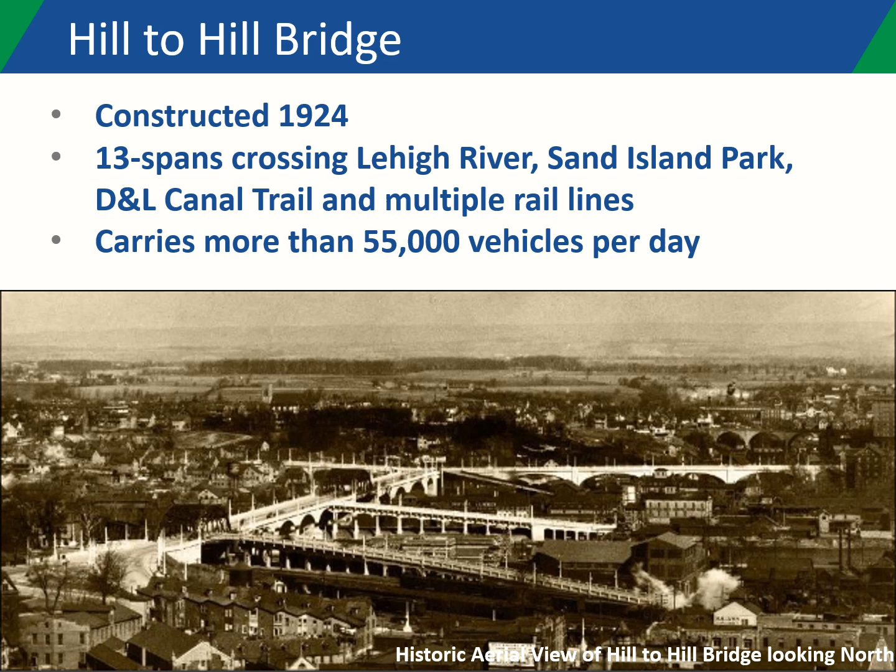Next, we will look at what goes into an alternatives analysis. The goals of the alternatives analysis for the Hill to Hill Bridge are to identify ways to address the deteriorating condition of the bridge, identify the resources which are present and surrounding the structure, look outside the bridge at issues such as traffic congestion, and collect input from stakeholders in the community.

There are 4 key phases of the alternatives analysis: 1. To define the study area. 2. To conduct data collection and analysis. 3. To identify the purpose and needs. And finally, 4. To develop alternatives and compare how well these alternatives meet the needs of the project.

The first step in the alternatives analysis is to define our problem area. We call this the project study area. Generally, this starts as the area that represents the combined footprint of all potential alternatives being considered.

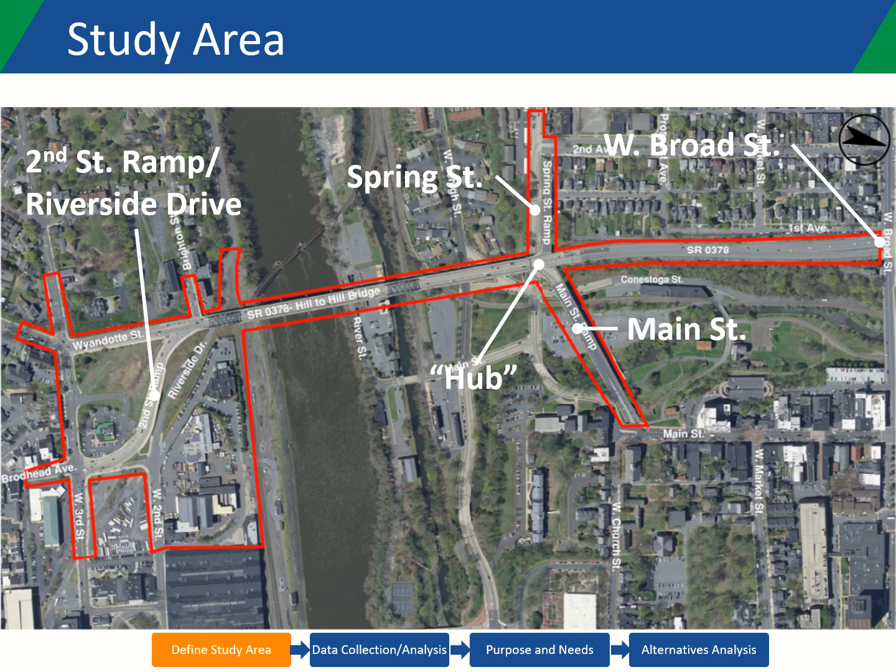For the Hill to Hill project, this area stretches out along SR 378 to include the West Broad Street overpass, the Main Street Ramp Bridge, the Spring Street Ramp Bridge, the hub, which is defined as where SR 378, Main Street, and Spring Street come together, the 2nd Street ramp and Riverside Drive, and the intersection of West 3rd Street and 378. The study area does not indicate the limits of disturbance, nor does it infer that all features within its boundaries will be worked on.

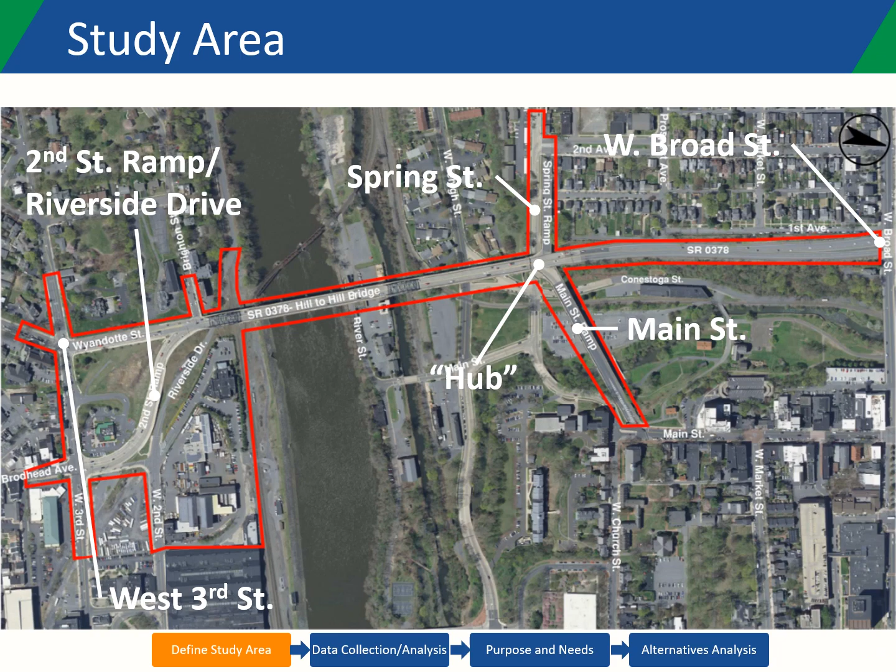With the study area defined, the project team can begin to initiate studies, conduct inspections, collect data, hear stakeholder input, and assess existing design criteria. This process has been ongoing for the Hill to Hill alternatives analysis.

Here are the highlights of the data collection and analyses which have been conducted so far. Supplemental inspection: a detailed field inspection of the existing Hill to Hill Bridge was conducted.

Recently, additional inspection efforts were completed for the Main Street and Spring Street ramps. These inspections help define the structural issues present and help develop structure-related needs for the project.

Stakeholder input: early input was received from several stakeholders and consulting parties from the surrounding community. This early engagement with project stakeholders is key to understanding the issues facing the community today and the potential impacts of construction.

Traffic and pedestrian studies. While this is the Hill-to-Hill Bridge project, there are significant traffic-related issues surrounding the structure. To understand these issues, traffic, pedestrian, and bicycle counts were conducted.

Average wait time, referred to as queue time, and travel time were evaluated. Turning movements were looked at, and levels of service, which help define how congested a roadway is in the existing condition, were identified. Why is all of this important?

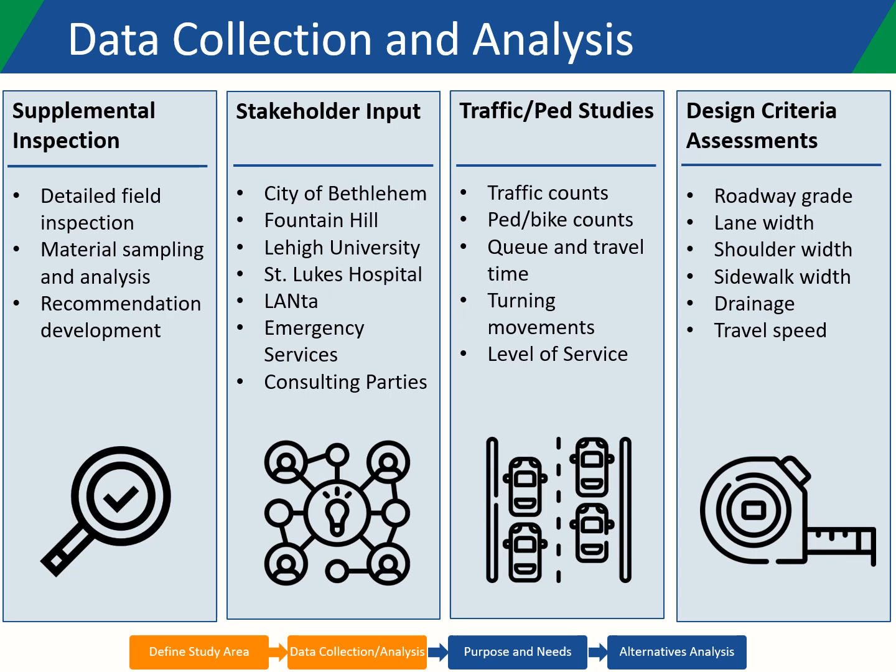For example, older structures tend to have been built with narrower widths. While the width may have been appropriate for vehicles that used these bridges decades ago, they may not meet current standards for lane widths.

As part of the data collection and analysis phase of the project, a list of site constraints is developed. Constraints may need to be avoided or the impact to them minimized.

For example, there are numerous utilities present which use the existing Hill-to-Hill bridge structure to cross the Lehigh River, pass under the approaches to the bridge, or are located within the study limits. These utility lines and the potential effects related to construction must be carefully considered as alternatives are assessed.

While temporarily shutting down an electric line to facilitate construction is possible in some circumstances, it comes at a cost to the project schedule and impacts the utility company and their customers.

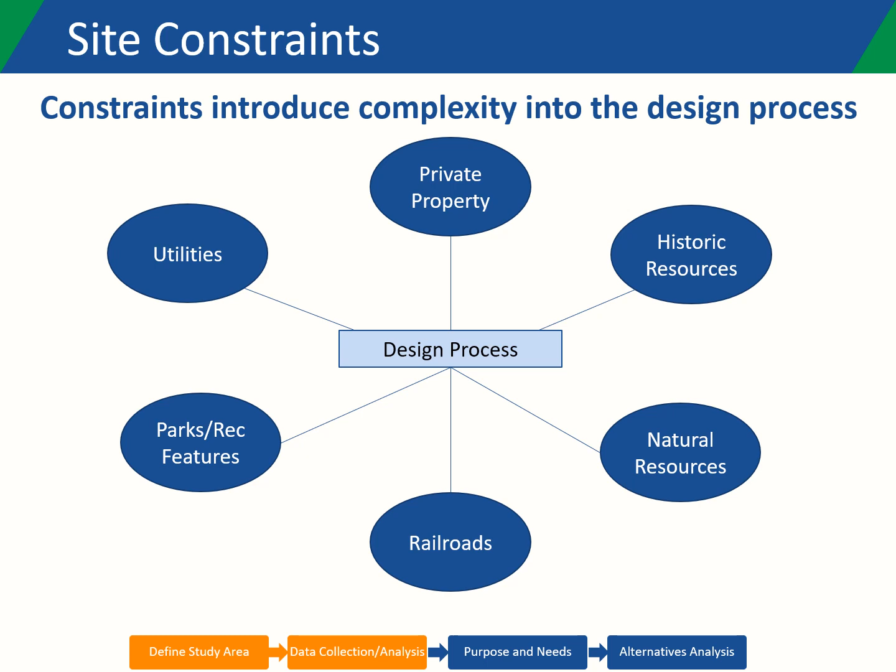Other examples of constraints include natural resources, railroads, public parks, and recreational features and private property. The following slides walk through some of the site constraints which exist for the Hill-to-Hill Bridge project.

using conduits located underneath of the existing sidewalks. These include fiber optic, cable, and telephone lines.

The design team will coordinate with these utilities to determine if temporary interruptions are acceptable, and if not, how the lines can be preserved and temporarily supported throughout construction.

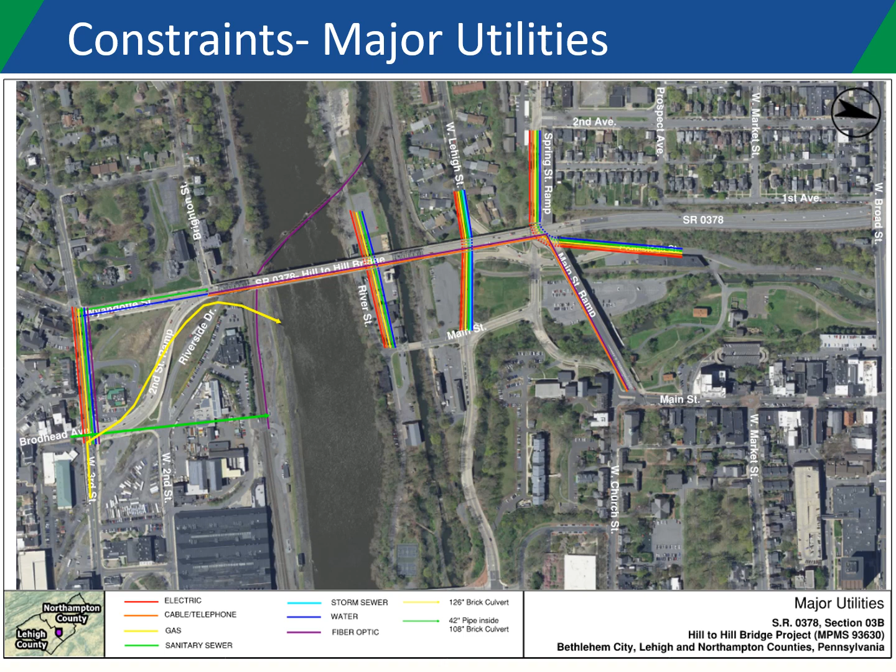Permanent relocation of utility lines may also be assessed. However, given the need to cross the Lehigh River, this is unlikely.

There are 4 primary Norfolk Southern rail lines throughout the project study area, which run underneath of the existing Hill-to-Hill Bridge on the north and south sides of the Lehigh River.

There are minimum horizontal and vertical clearances for these lines, which must be considered for alterations to the existing structure and for any new structure which may cross over the line.

These represent vertical constraints on the project and result in direct impacts to how alternatives tie back into the approach roadway on either side of the structure.

Having to provide additional vertical clearance for a new structure, for example, could result in significant work to tie the new structure back down into the existing approach roadways.

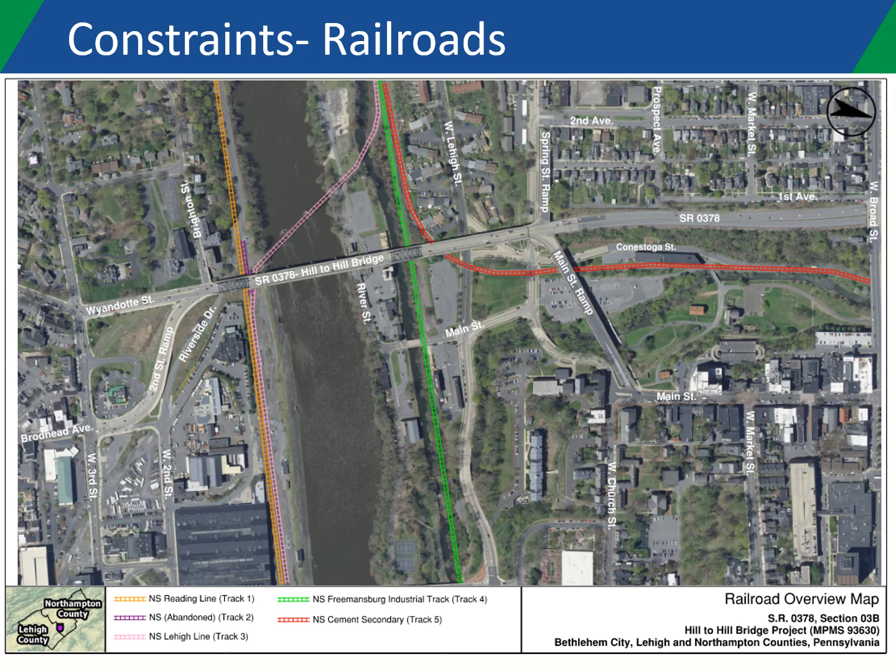Another consideration is the presence of trails within the project study area. Enhancing bicycle connectivity is a regional and national goal that the Hill-to-Hill Bridge project must consider.

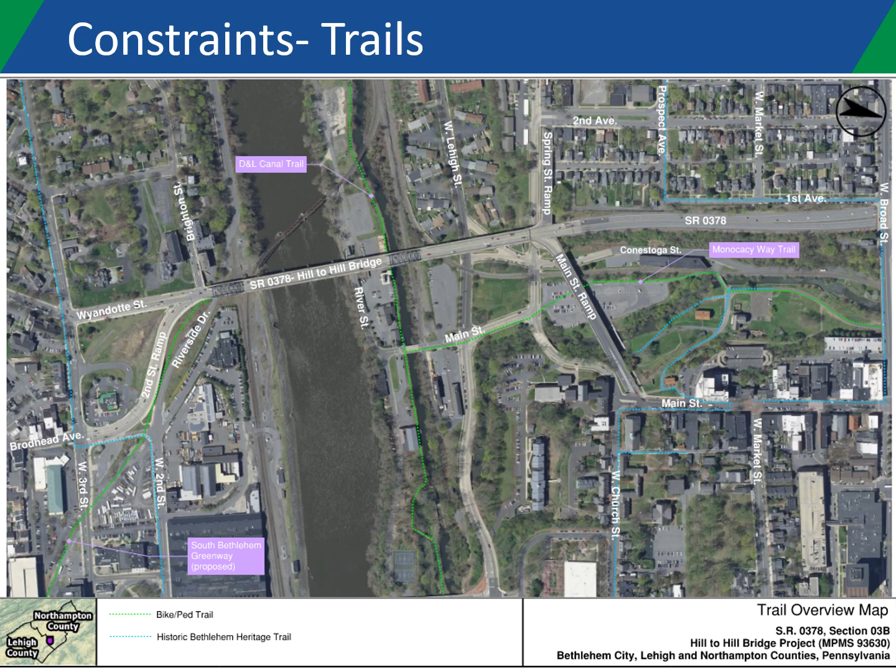Recreational features such as the D&L Canal Trail and the planned South Bethlehem Greenway are located near the project, and improving connectivity for bicyclists and pedestrians was brought up early on by project stakeholders as an important local consideration.

There are also a number of environmental constraints present within the project study area, including historic resources shown in yellow, recreational resources shown in green, and special protected recreational lands shown in purple. Additionally, there's a levee system along the south bank of the Lehigh River.

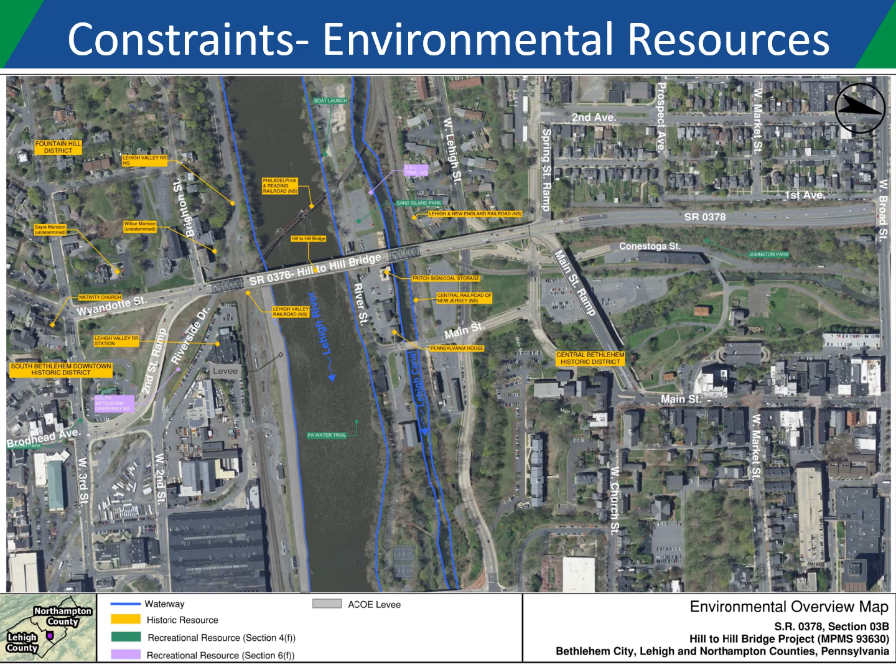Generally, the governing laws and regulations which protect these resources require that transportation agencies look to avoid impact, if possible, to these resources. If impacts are unavoidable, they must be minimized and mitigated. A key component of the alternatives analysis is evaluating each alternative's impact to these resources and determining if the purpose and need of the project could be accomplished through an alternative which avoids or lessens impacts.

As touched on in the previous slide, adverse effects to historic and archaeological resources must be avoided if possible. If adverse effects are unavoidable, agencies are required to minimize their impact to the extent possible and develop mitigation measures to offset these impacts.

As part of this project's initial studies, research was conducted into the surrounding historic resources to determine which are eligible for inclusion on the National Register of Historic Places. Present within the study limits are individual resources such as the Nativity Church and Lehigh Canal, and historic districts such as the Central Bethlehem and South Bethlehem Downtown Historic Districts, which are comprised of dozens of contributing resources.

While many of these resources intersect the project area and the study limits, the two resources which are most likely to be impacted by several of the alternatives being studied are the Hill-to-Hill Bridge itself and the Fritch Fuel property. These are detailed further on the next slide.

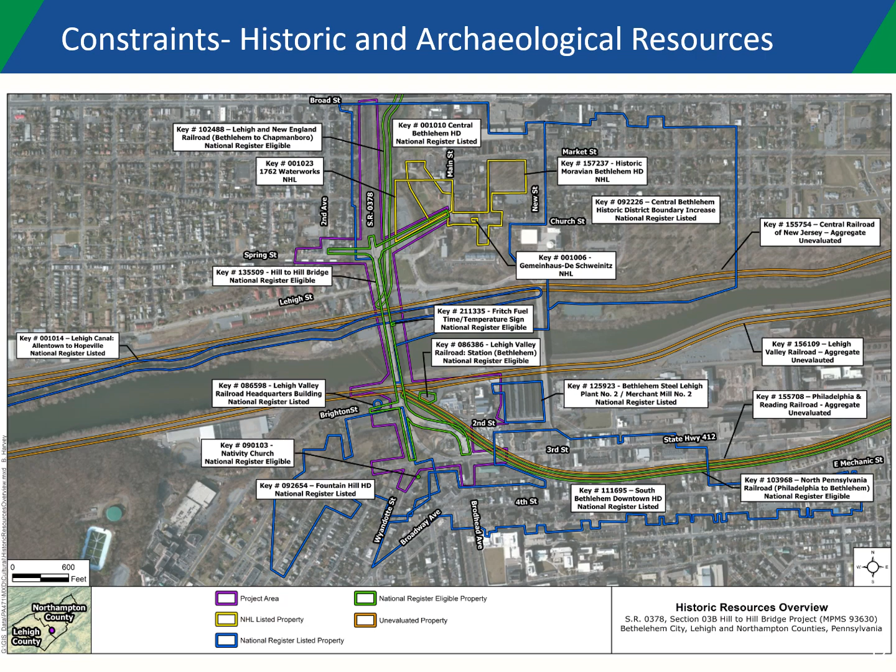During the early studies for this project, the Hill-to-Hill Bridge was evaluated to determine its eligibility for inclusion on the National Register of Historic Places. It was found eligible, with its character-defining features being the closed spandrel arches, decorative concrete elements, and the Hudson truss spans. Alterations to these components of the bridge may result in an impact to its historic designation.

In addition to its eligibility as an individual resource, the Hill-to-Hill Bridge is a contributing resource to the Central Bethlehem and Fountain Hill historic districts.

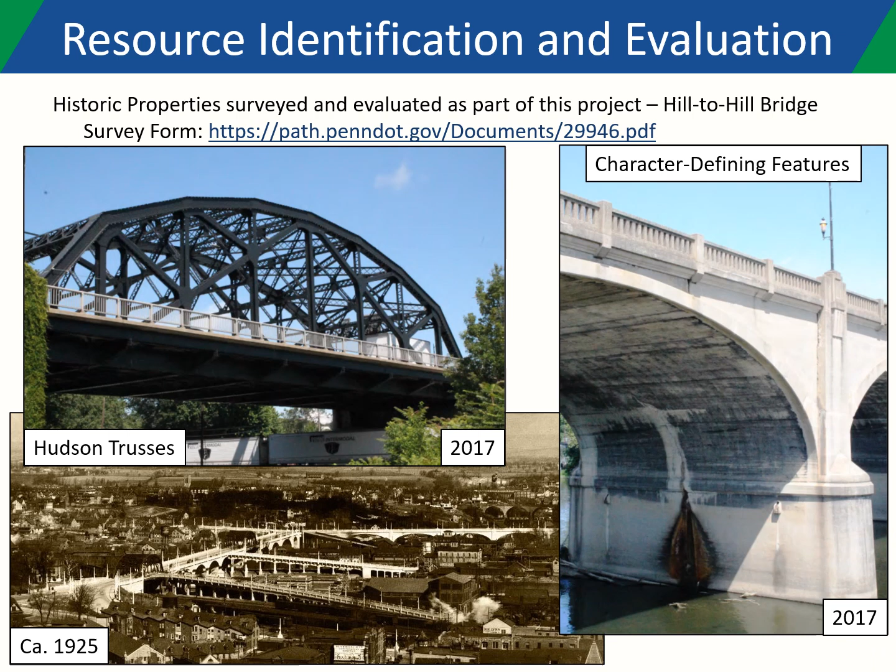The early studies also determined that the Fritch Fuel Company time and temperature sign is eligible for the National Register of Historic Places. The coal bins on which the sign sits today had already been determined to be contributing resources to the Central Bethlehem Historic District in 1986.

Additional information on historic resources for the project can be found at path.penndot.gov.

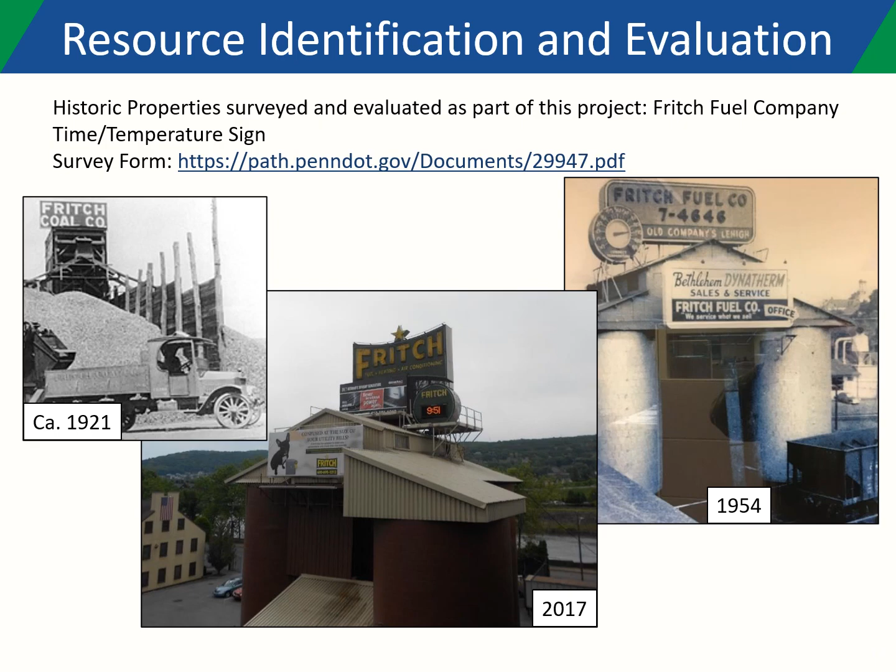Next, we will talk about purpose and need, its role in transportation projects, and its importance when assessing alternatives.

The purpose and need statement is the foundation on which transportation projects are built. The purpose is an overarching statement of what the project is intended to accomplish, while the needs are specific problems or deficiencies that the project seeks to address. Together, these form the purpose and need statement.

It's important to note that the purpose and need statement does not dictate an outcome or identify a solution. It's a problem statement that is used as the bar to measure all alternatives by.

The data collection, analysis, stakeholder input, and preliminary studies which have been conducted up until this point help define the project's purpose and needs. The purpose and needs statement is developed in close coordination with the Federal Highway Administration, which, due to the anticipated use of federal funds for construction, are the lead federal agency for this project. Alternatives which cannot meet the purpose and needs are dismissed from further consideration.

For the Hill-to-Hill Bridge, the purpose of the project is to provide a long-term safe and efficient crossing which facilitates vehicular, rail, bicycle, and pedestrian flow, while also accommodating the current and future growth of the city and generally maintaining or improving upon network congestion levels compared to future no-build conditions.

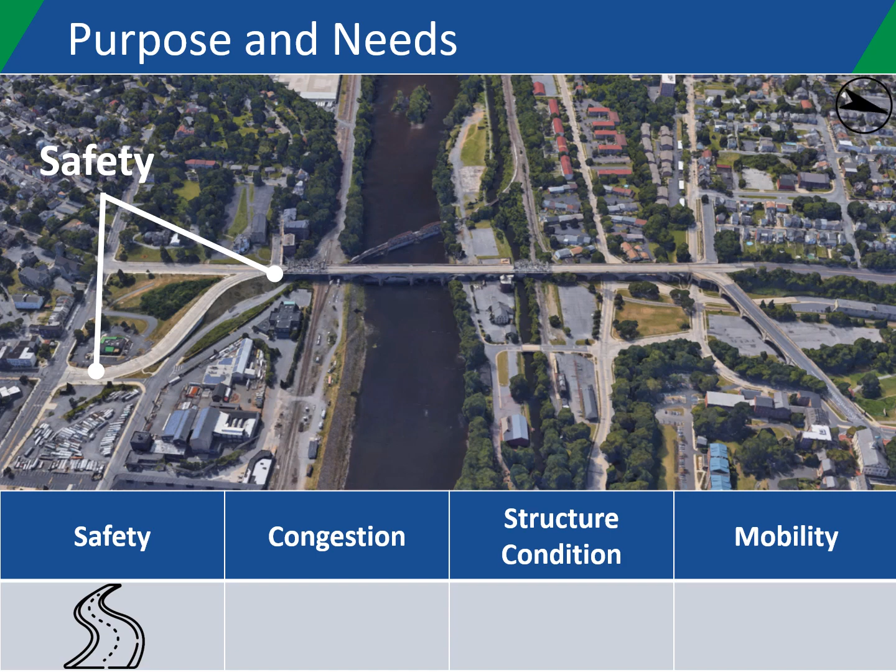Based on the types of crashes observed, a primary factor is likely the lack of sufficient stacking length for vehicles. Additionally, there is insufficient turning radius on the south end of the bridge for southbound vehicles turning right onto Brighton Street and for vehicles turning onto the northbound lanes across the bridge from the 2nd Street ramp.

Congestion. The Hill-to-Hill Bridge serves as a vital link for the city and is a regional transportation route. Based on initial studies conducted, over 55,000 vehicles per day on average use the bridge, with 6% of those being trucks. During the AM and PM peak hours for travel, significant congestion is regularly observed. Based on traffic studies conducted for the project, which simulate what traffic will be like in the years to come, congestion is not forecasted to improve.

The major causes of congestion identified in the project limits occur on the south side of the Lehigh River and include the following: lack of capacity for southbound traffic traveling on 378 at 3rd Street, lack of queue storage for northbound traffic on 378 at the 2nd Street ramp, and lack of capacity for southbound left turns from 378 to the 2nd Street ramp and northbound right turns from the 2nd Street ramp to 378.

The ability of each alternative to improve the existing congested conditions is assessed as part of the alternatives analysis.

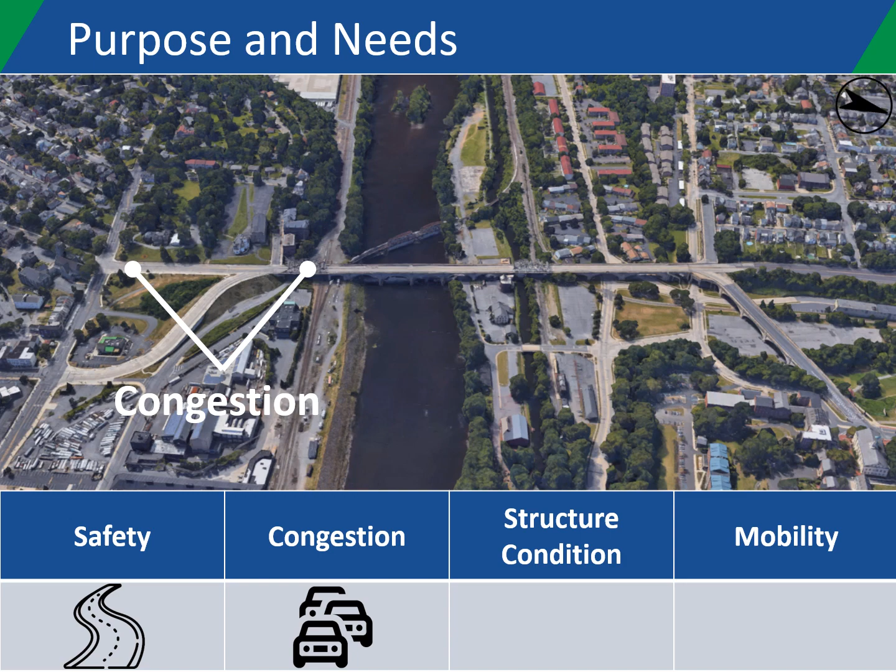Structure condition. Several elements of the existing Hill-to-Hill Bridge, whether by original design or through wear and tear over the years, warrant action to ensure that the structure does not deteriorate any further. Based on recent inspections, the main repairs required to extend the life of the bridge include improving the drainage system, repairing deteriorated concrete throughout the bridge, and repairing the steel trusses.

The ability of each of the alternatives to address these observed deficiencies is assessed as part of the alternatives analysis.

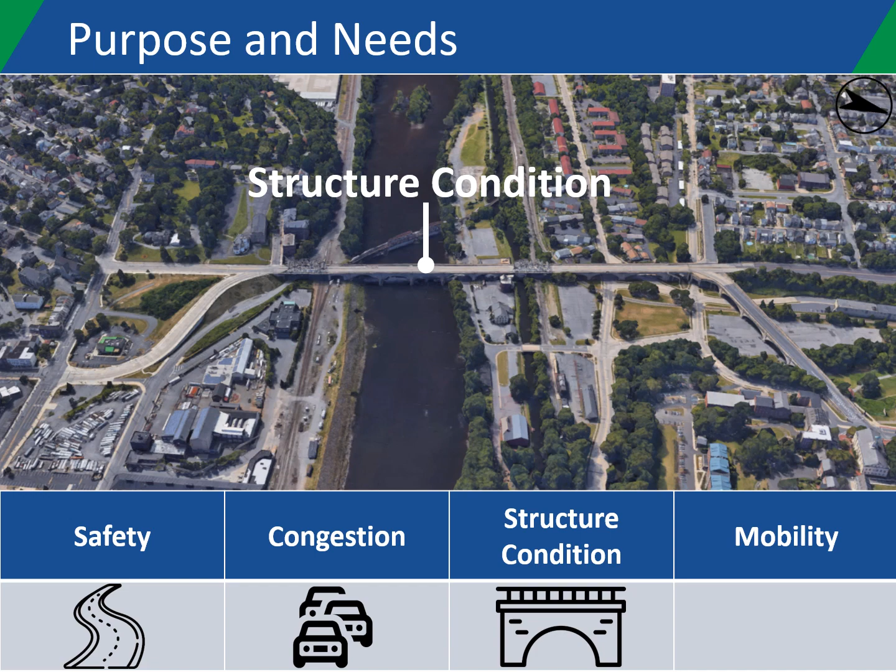Mobility and modal interrelationships. SR 378 connects the north and south sides of the city of Bethlehem, providing a critical link for residents, businesses, and services. Not only does it serve as an important role in connecting the north and south sides of Bethlehem, it also is critically important for many festivals and activities which take place throughout the year, including Music Fest.

Initial studies have indicated that nearly 300 to 350 pedestrians and 60 to 100 bicyclists use the bridge each day. During events such as Music Fest, up to 150 to 250 pedestrians use the bridge per hour. Trails, both existing and planned, also are anticipated to result in increased usage of the bridge by pedestrians and bicyclists.

Additionally, the bridge serves as a connection for public transit. However, based on initial coordination with LANTA, buses currently do not route over the bridge due to unreliable travel times. Maintaining and improving upon these important interconnections with a variety of modes of transportation is a core need for this project.

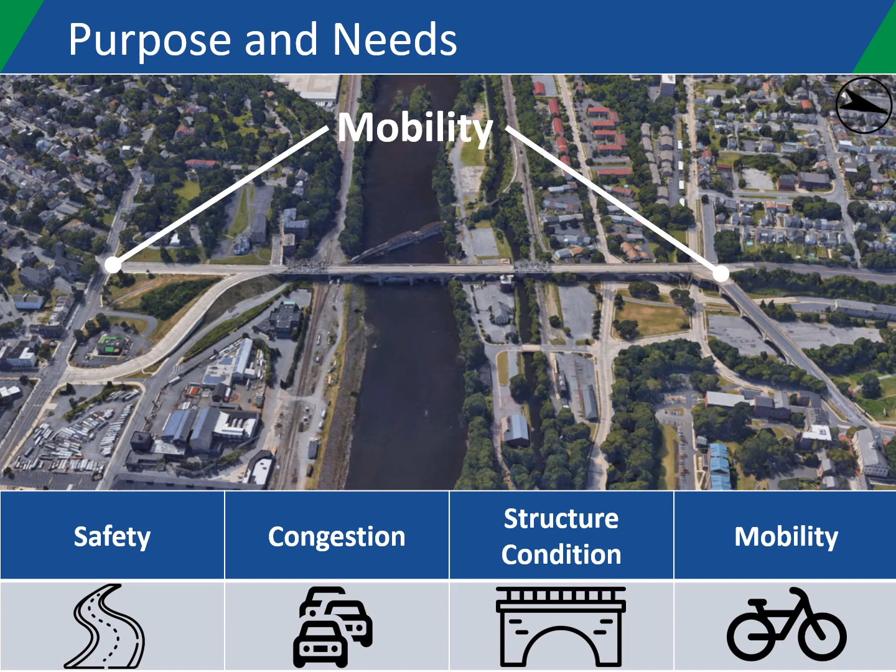In addition to the project needs, project goals can be developed. Goals are defined as secondary objectives and, unlike project needs, cannot be used to dismiss alternatives. These are the nice-to-haves, which may come from stakeholder coordination or local requests.

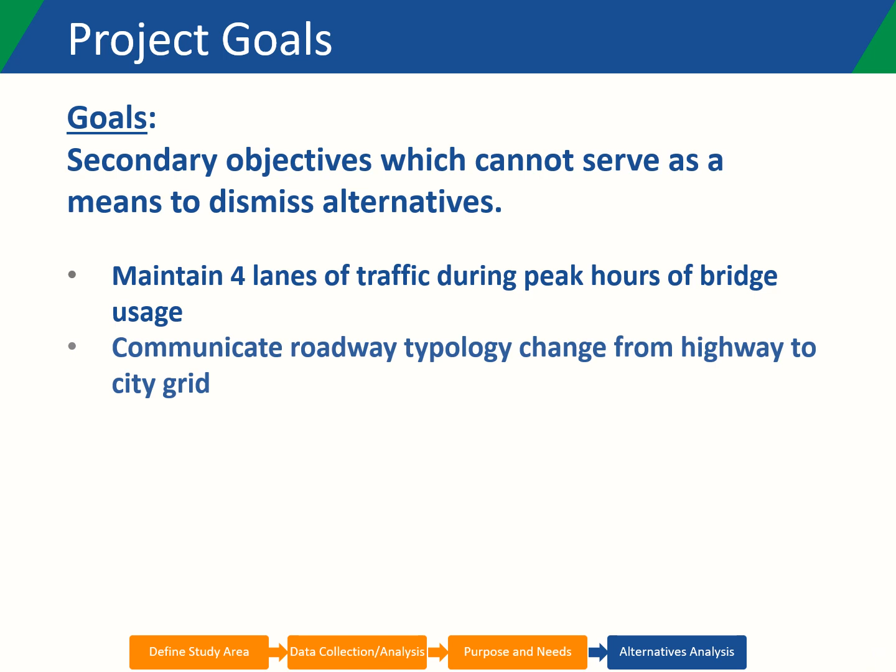For the Hill-to-Hill Bridge project, 6 main goals were developed and include the following: maintain 4 lanes of traffic during peak hours of bridge usage, communicate roadway typology change from highway to city grid, minimize impacts to cultural resources, improve 2nd Street connection, preserve Main Street ramp bridge, and design not to preclude future improvement, for example, plans by the city, railroad, trails, PennDOT, etc.

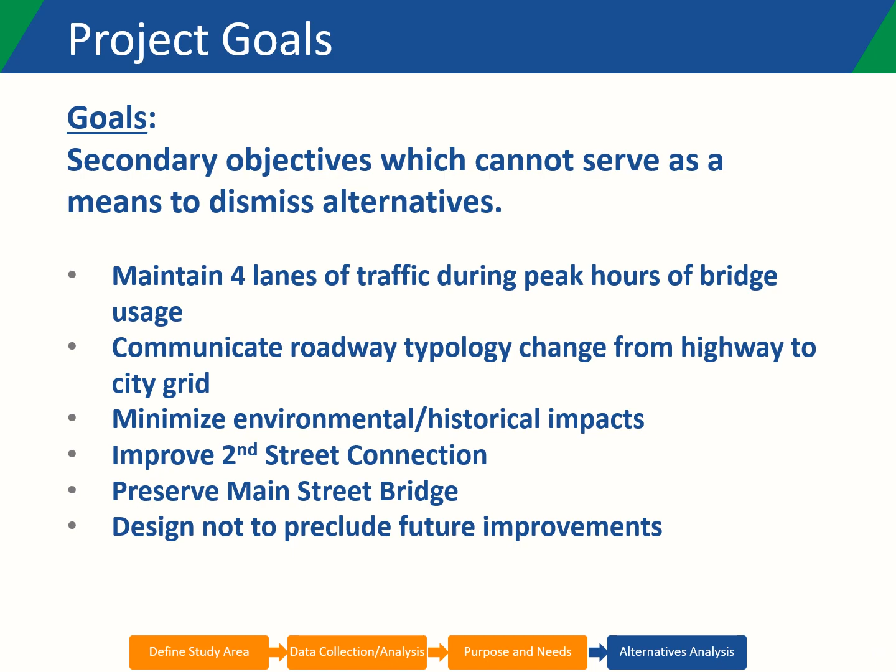As you will see in our discussion today, a key challenge for the alternatives is completing the work while limiting impact to the surrounding transportation network. With SR 378's high traffic volume and a lack of suitable crossings which could handle this number of vehicles, maintaining access across the bridge for traffic during construction is a key issue.

For example, Alternative 2 included the full rehabilitation of the existing structure, including the removal and replacement of fill material which resides underneath of the pavement and on top of the existing concrete arches. To accomplish this type of work, a significant amount of time and access is needed, resulting in long duration shutdowns of the Hill-to-Hill Bridge. Even with this structure work, this alternative would still not address the safety and congestion needs.

For these reasons, this alternative was dismissed from detailed analysis. Alternative 3A was dismissed as it would include the removal of the southern truss from the existing bridge, resulting in an impact to the bridge's historic character, and because of another alternative developed, 3B, which accomplishes a similar level of benefit with a lesser impact by preserving the trusses.

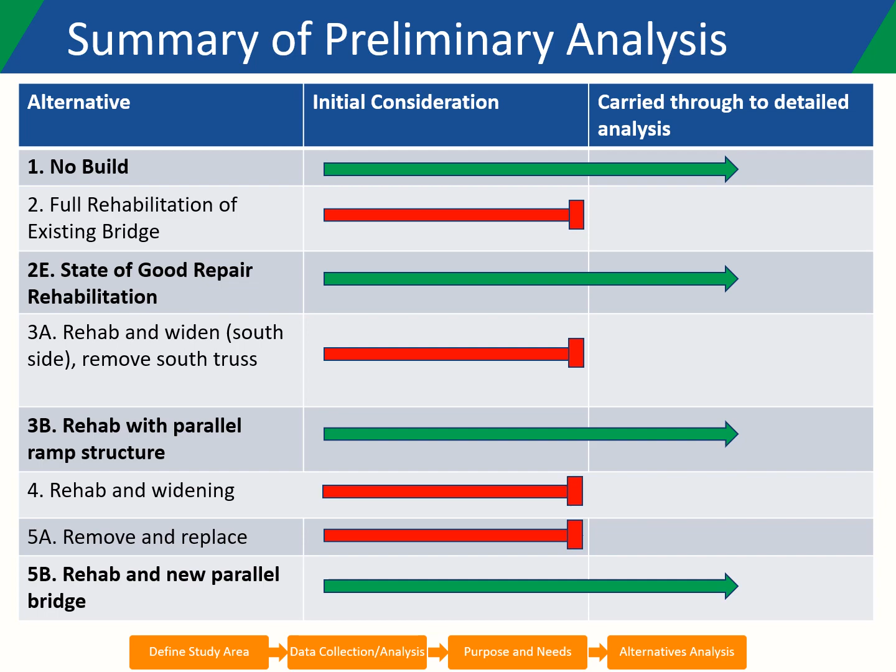For each of the alternatives which progress to detailed analysis, we will walk through their scope of work and describe how each meets or does not meet the project needs.

A green check mark above the need symbol indicates that the base need has been met. Alternatives which fully meet the needs receive a green check and the full symbol, while alternatives that make improvements and therefore meet the minimum base need use a partial symbol.

The first alternative, the no-build alternative, typically receives the most questions during public and stakeholder engagement as people wonder why this do-nothing alternative is even being considered. This alternative includes no physical work on the structure or approaches, and serves as a baseline by which other alternatives can be assessed.

For example, the design team may investigate how traffic patterns are anticipated to evolve in the future if conditions remain as they are today. This is a helpful tool in understanding how much each alternative is anticipated to improve on the existing conditions of today, as well as the conditions 10 to 20 years from now.

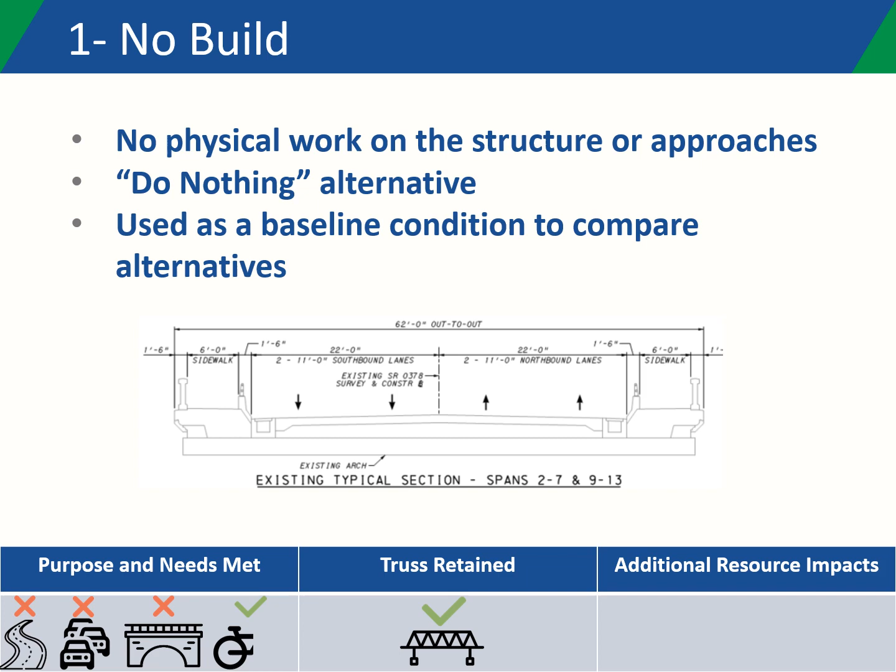There are no additional resource impacts for the no-build alternative. However, by doing nothing to address the condition of the existing bridge, it will continue to degrade. Components which are significant to its designation as a historic resource will also degrade and may eventually result in effect to its historic status.

Alternative 2E represents the state of good repair level rehabilitation of the existing structure. The goal of this alternative is to extend the structure's service life. This alternative maintains the existing structure and its geometry and includes preventative level repairs, improvements to drainage, roadway surface repair, sidewalk and pedestrian railing repair, and improvements to lighting.

So how does this alternative meet the needs of the project? For the safety need, Alternative 2E does not provide the minimum required lane widths due to there being no widening. However, this alternative does not address the insufficient stacking length or limited turning radius at the south end of the bridge. Therefore, Alternative 2E does not meet the safety need and receives a red X above the safety need symbol.

For the congestion need, Alternative 2E does not address the queuing problem for left turns onto the 2nd Street ramp. Therefore, this alternative does not meet the congestion need.

For the structure need, this alternative addresses the basic deteriorated features observed as part of the detailed inspection. It would include repairs to the existing trusses and structural repairs at localized areas which are easily accessible. The existing roadway would receive spot repairs and a concrete overlay. While these surface level repairs are sufficient to achieve the core structure need, they do not address the underlying issues which cause deterioration of the bridge deck.

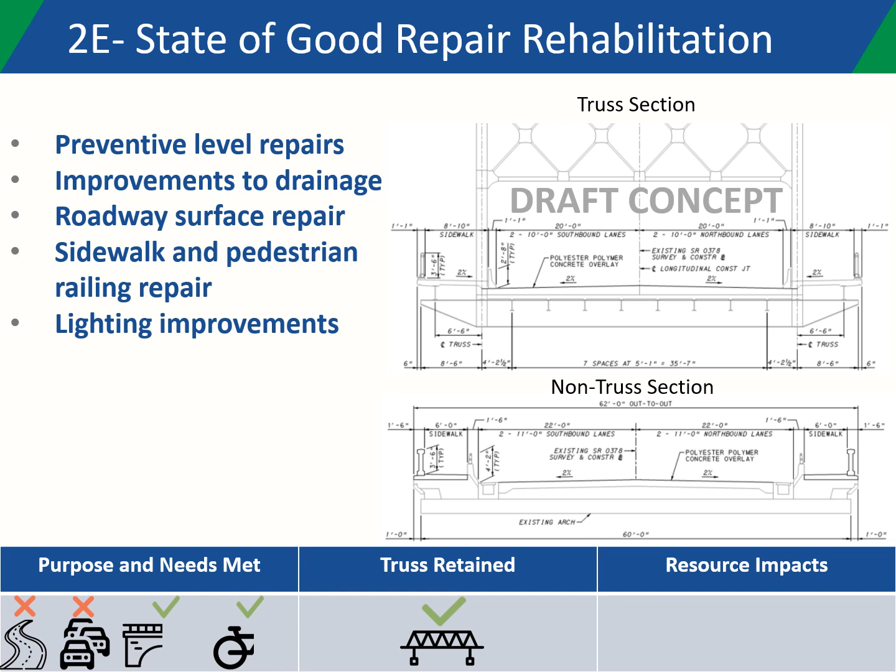Given the limited scope of work on the existing bridge, the north and south trusses would be maintained, and there are no additional anticipated resource impacts.

As was seen with Alternative 2E, the safety and congestion needs were not met since additional width on the bridge is needed at the 2nd Street intersection to reduce congestion.

Alternative 3B iterates on 2E by including the same level of rehabilitation scope while adding a new parallel structure on the south end of the existing bridge to provide additional width. This results in a balanced approach between accomplishing the needs of the project and minimizing the impact of the surrounding constraints, properties, and resources. The new eastern structure would be constructed to support 2 northbound travel lanes and a sidewalk. The new structure would taper back and tie into the existing structure just before the northern truss, allowing both the southern and northern trusses to be maintained under this alternative.

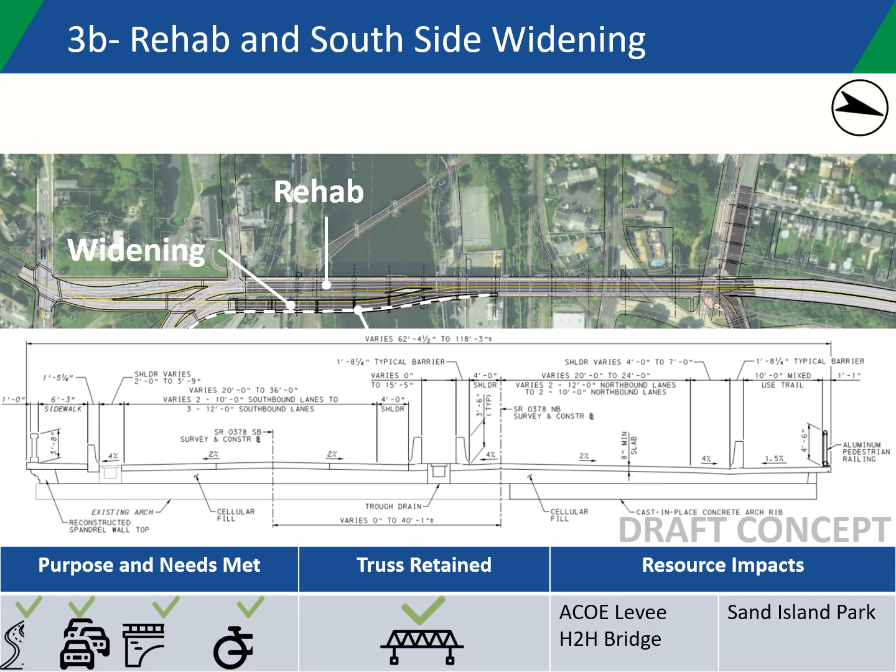Looking at the needs of the project, we first review the safety need. Similar to Alternative 2E, Alternative 3B maintains the minimum required lane widths across the existing structure and adds additional shoulder width on the southern end to address the existing substandard width. The turning radii from the 2nd Street ramp to the northbound travel lane on the bridge is improved by the parallel structure on the southern end. However, the movement from the southbound travel lane to Brighton Street is not improved, and the northern portion of the bridge maintains its existing section. This alternative addresses the insufficient stacking length and improves the 2nd Street ramp turning radii at the south end of the bridge. Therefore, it meets the minimum basic safety need.

Regarding the congestion need, this alternative improves upon 2E by adding an additional left turn movement onto the 2nd Street ramp. A right turn lane to westbound 3rd Street is also added under this alternative. Based on our preliminary traffic analyses, these are the most impactful ways to address the congestion need, and so this alternative meets the congestion need.

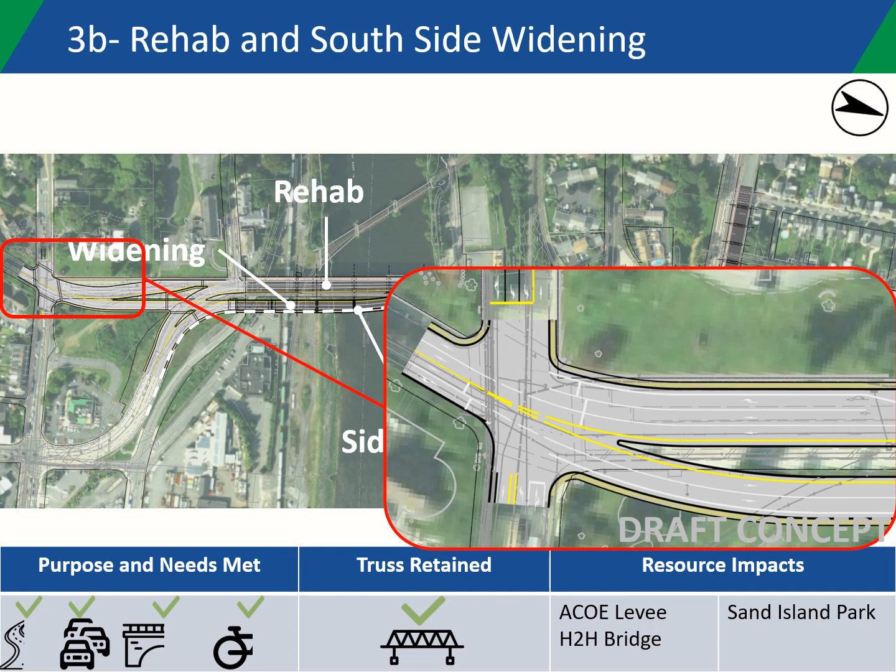Alternative 3B retains the same rehabilitation scope as 2E, which improves the structure condition. Therefore, it too meets the minimum basic structural need.

Regarding the mobility need, Alternative 3B provides a 6-foot sidewalk along the new parallel ramp structure, which can be used by pedestrians and bicyclists who choose to walk their bikes across the bridge. While this is an improvement to access compared to 2E, it does not carry a mixed-use trail across the bridge. This alternative, therefore, meets the minimum basic mobility need.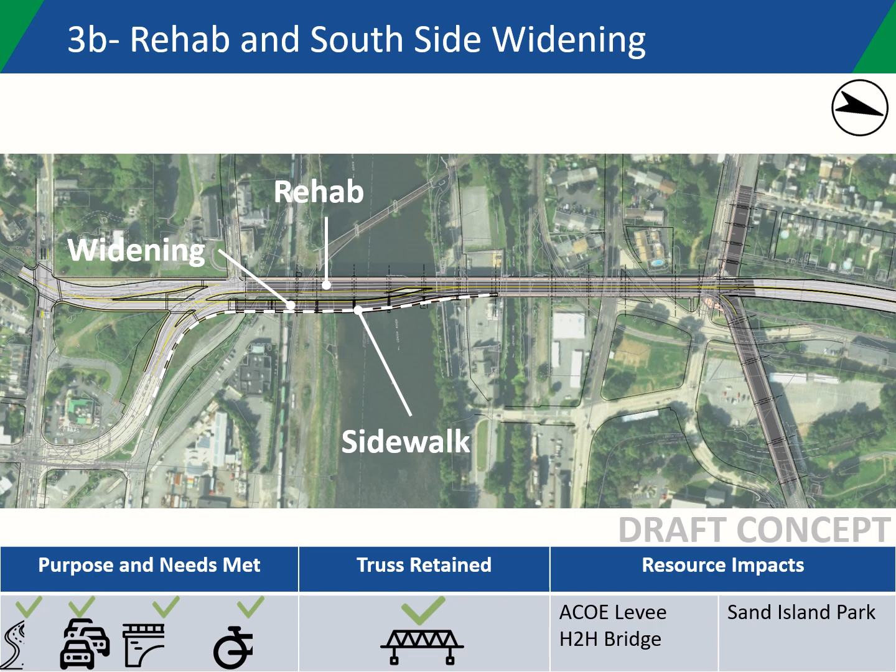Both the south side and north side trusses are maintained in this alternative. However, due to the larger footprint of this alternative and the new abutments and piers necessary to carry the new structure, this alternative results in impacts to the Army Corps of Engineers levee, Sand Island Park, and the Lehigh River. Additionally, the new parallel structure will alter the overall appearance of the Hill-to-Hill Bridge, as the new structure will be constructed in front of the bridge's concrete arches and southern truss. While the design of the new structure can be done to minimize visual impact to the extent possible, this impact would need to be further assessed as part of the design process.

Alternative 5B iterates on 3B by extending the new structure proposed under 3B for the full length of the existing bridge. The new structure will be constructed to carry 2 lanes of northbound traffic, full shoulders, and a widened sidewalk supporting a mixed-use trail. The existing structure would remain, and the lane arrangement would be revised to carry 3 lanes of southbound traffic with narrow shoulders.

The scope of repairs to the existing structure would be limited to the rehabilitation described under Alternative 2E. However, the additional width provided by the new parallel structure would allow for all traffic to be diverted off of the existing structure should additional work be required on the Hill-to-Hill Bridge in the future. The new structure allows for the carrying of a 10-foot mixed-use trail capable of handling both pedestrians and bicyclists completely across the river and onto the Main Street ramp.

Regarding the safety need, Alternative 5B provides sufficient width to provide adequate travel lanes and shoulders for the length of the new parallel structure, which helps to reduce the stacking length. However, there is not enough width to provide for full 4-foot shoulders due to the restrictions in width caused by the existing trusses. Only 2-foot wide shoulders can be provided as a result of this restriction. The turning radii is also improved on the northbound roadway at the southern end. Overall, this is an improvement compared to Alternative 3B, which only improves the extra width up to the northern truss.

For the congestion need, Alternative 5B is similar to 3B in that it provides for 2 left turn movements onto the 2nd Street ramp. Through and right turn movements at the intersection of 3rd Street are also provided under this alternative, and an additional queuing length is provided.

For the structure need, Alternative 5B continues with providing the same scope of rehabilitation as seen in 2E and 3B. Finally, 5B meets the mobility need to the fullest extent by improving bicycle connectivity and access compared to 3B, accomplished by providing a mixed-use trail across the entire length of the structure.

While Alternative 5B has distinct advantages over the other alternatives considered related to the project needs, it comes at a cost. Alternative 5B is the most impactful to adjacent resources, properties, and historic features. The Fritch Fuel sign and silos would be removed to construct the new parallel structure, resulting in a direct impact to this resource and the Central Bethlehem Historic District.

More significant acquisition of land from the Lehigh Valley Railroad Station would also be required, and the effect to this historic resource would need to be carefully evaluated during design. Additionally, new piers will be placed within the Lehigh River, Army Corps levee, and Sand Island Park.

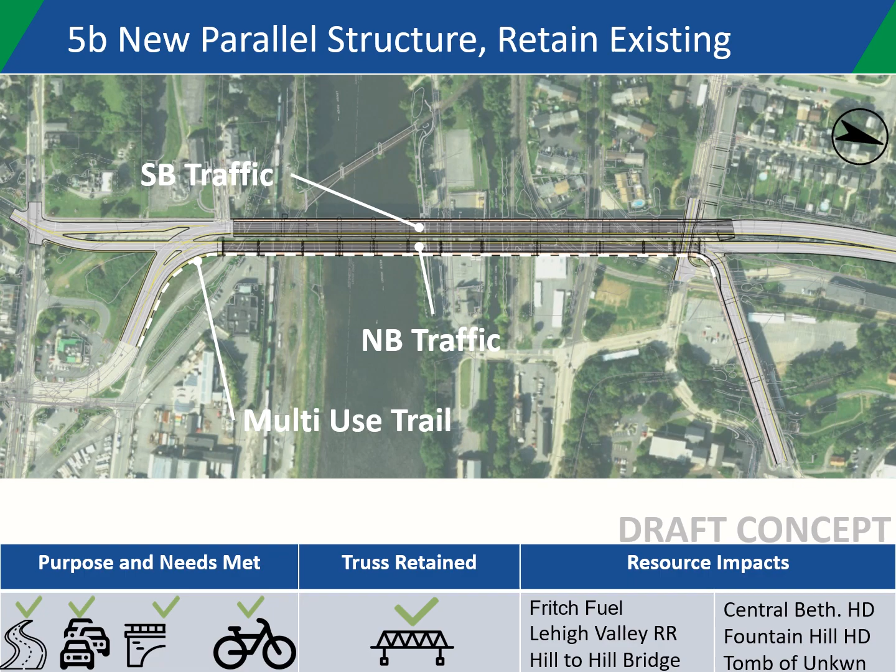This alternative also has the greatest potential to impact archaeological resources due to its large footprint, although additional studies would be required during design to determine the potential presence of these archaeological resources.

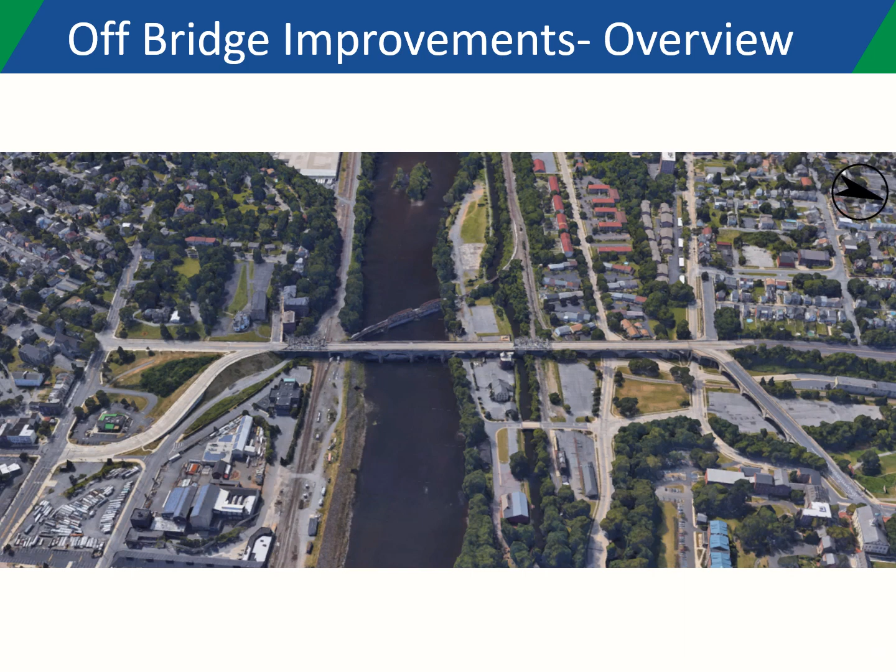In addition to the main alternatives which are focused around the bridge itself, other off-bridge improvements are being evaluated as part of the alternatives analysis. For this assessment, we focused on the adjoining 2nd Street, Main Street, and Spring Street ramp.

As part of the early discussions with stakeholders, improving access to the 2nd Street ramp and SR 378 is being investigated. We will discuss our findings for this ramp on the next slide. The Main Street ramp will be impacted by several of the alternatives under consideration, and preventative maintenance level repairs are being looked at for this ramp structure.

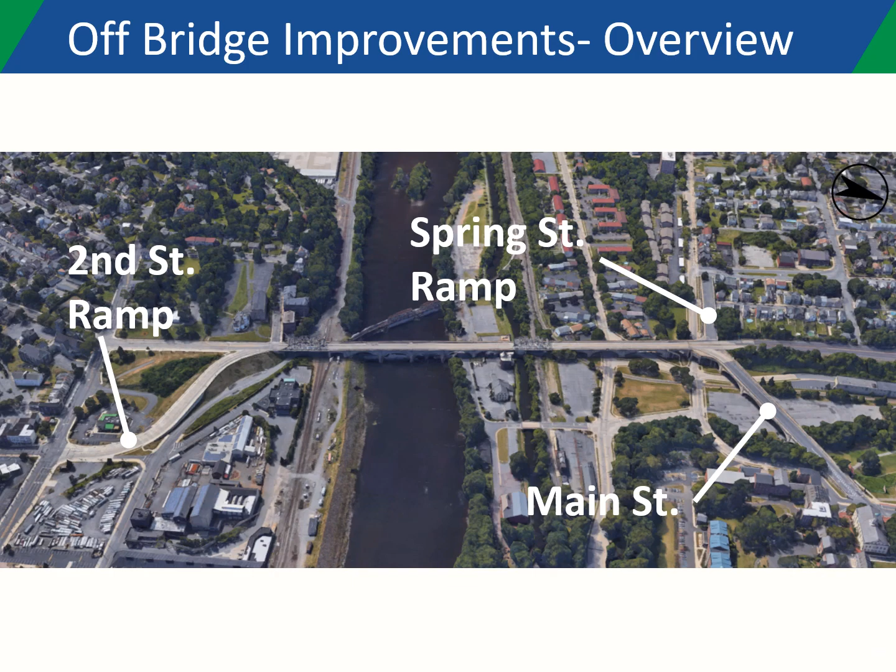Finally, the Spring Street ramp was initially looked at to determine if enough traffic could be diverted off of SR 378 to improve congestion. Several options were evaluated to improve the Spring Street ramp. However, based on a preliminary traffic analysis, it is not anticipated that opening and improving the Spring Street ramp for use by southbound 378 traffic would divert a sufficient number of vehicles to result in any meaningful improvement to traffic flow. We refer to these improvements as add-ons or a la carte, as they generally can be added to any of the alternatives under consideration.

Early on, the city of Bethlehem requested that PennDOT investigate improvements to allow vehicles to turn onto the 2nd Street ramp from 2nd Street. Currently, vehicles who wish to get to 378 from this area must do so by using West 3rd Street. During the alternatives analysis, improvements to this connection were evaluated.

Important constraints to consider at this location include the elevation difference between 2nd Street and the 2nd Street ramp, special protected grant land located along Riverside Drive, the historic Lehigh Valley Railroad Station property located between Riverside Drive and the railroad, and the parking area used for St. Luke's building.

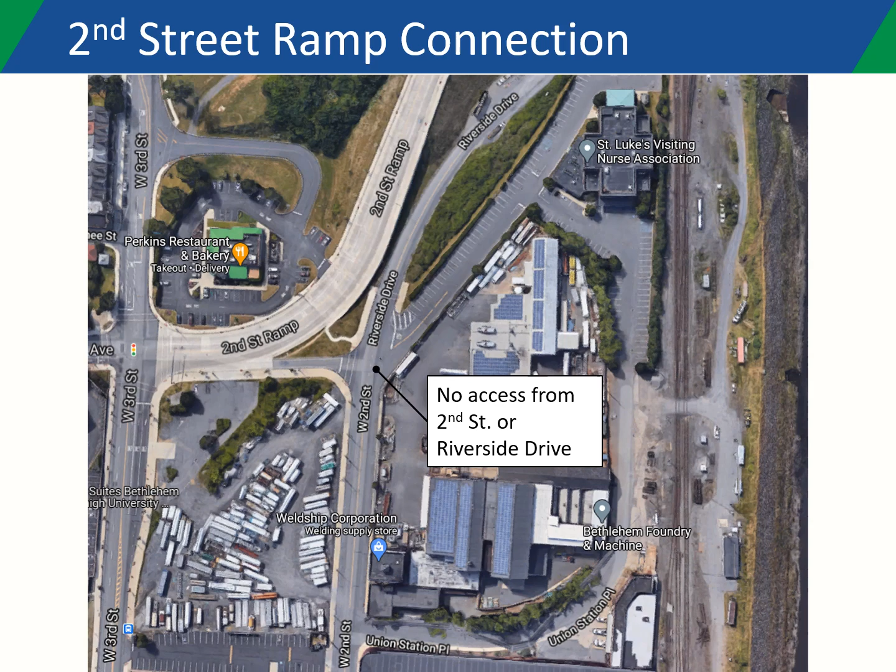Based on a preliminary analysis conducted alongside the alternatives analysis, the intersection of 2nd Street and Riverside Drive can be modified to allow movements onto the 2nd Street ramp. This can be accomplished with minimal impacts to surrounding properties.

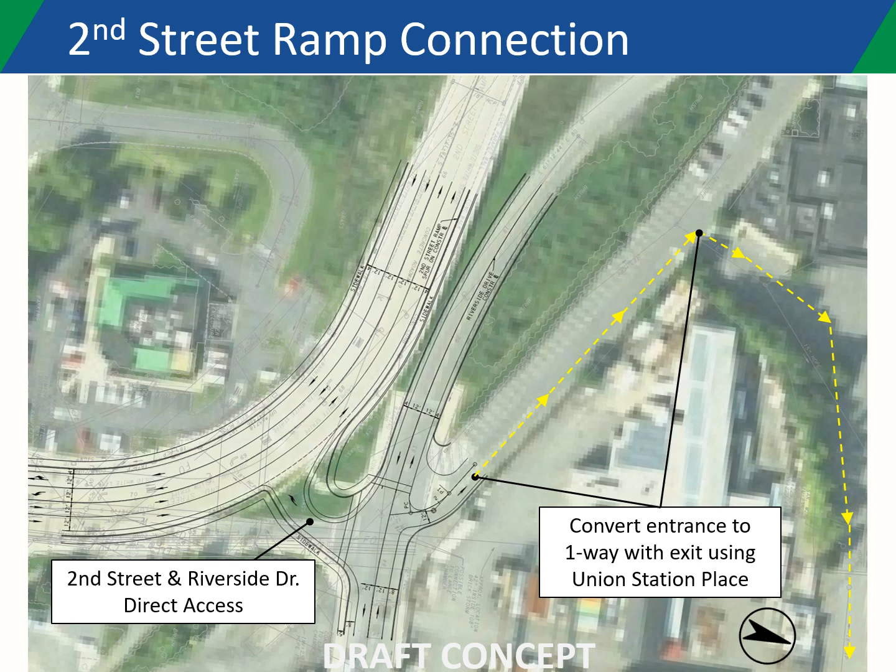Both alternative 3B and 5B meet the minimum base needs of the project, with 5B resulting in improvements to the safety need given the additional lane and shoulder width which can be provided in comparison to 3B. Alternative 5B also results in improved connectivity for bicyclists compared to 3B. Since both of these alternatives meet the needs of the project, we now look at other factors to consider, including the project goals.

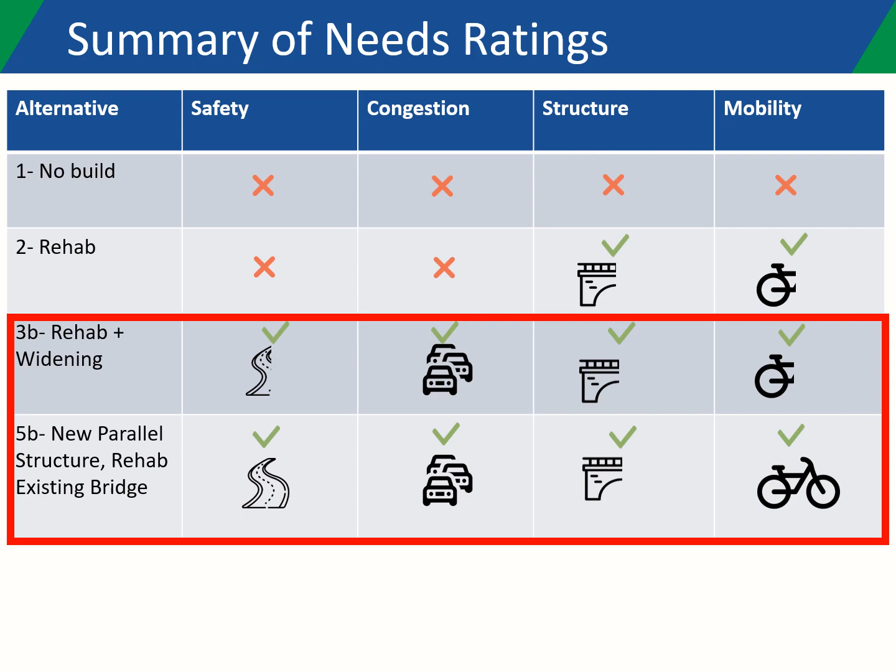Comparing the anticipated impact to traffic of both 3B and 5B, we see that alternative 3B will require temporary single-lane closures during nights and weekends in order to facilitate rehabilitation activities on the existing bridge. The connection of the new structure to the existing bridge would necessitate traffic to be reduced to one southbound and one northbound travel lane.

The construction of alternative 5B in comparison would first include construction of a new parallel structure. It is anticipated that this construction could take place while maintaining 4 lanes of traffic on the existing bridge. Connecting the new parallel structure back into the Main Street ramp would necessitate a short duration complete closure of the Main Street ramp, estimated to last between 1 to 2 weeks. Similar to alternative 3B, rehabilitation of the roadway across the existing bridge would require traffic to be reduced to a single northbound and southbound lane, which would be maintained on the new parallel structure.

What sets alternative 5B apart from 3B is a substantial increase in impacts to historic and environmental resources as well as private property. Compared with 3B, 5B would result in the removal of the Fritsch sign and silos, impact the central Bethlehem and Fountain Hill historic districts, and have a substantially larger visual impact on the existing hill-to-hill bridge.

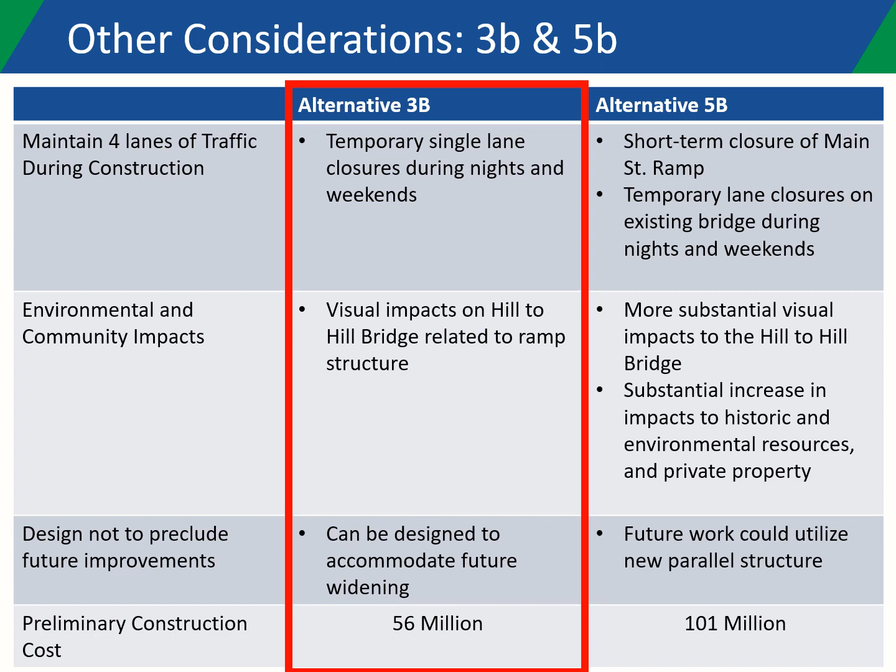With a preferred alternative identified, the next phase of the project will progress alternative 3B through preliminary engineering, final design, and ultimately to construction. Soliciting public input now and throughout the design phase will continue. In preliminary engineering, the initial engineering and environmental analyses and design will be completed for the proposed improvements.

Moving into final design, expected to start in 2023, final engineering studies and design will be completed. Coordination with utilities will be finalized, permits applied for and acquired, and property impacts will be assessed and owners coordinated with. Final design will develop the project's final plans, specifications, and engineer's estimate, which will be used to solicit bids from the contracting community for the construction of these improvements.

Given the current schedule, it is anticipated that construction will begin in 2025 and be substantially complete by 2027. During the preliminary and final design phase of the project, PennDOT will continue the conversation with the community and project stakeholders through additional public and stakeholder meetings. Hopefully, the next time we meet to discuss this project, it will be in person.